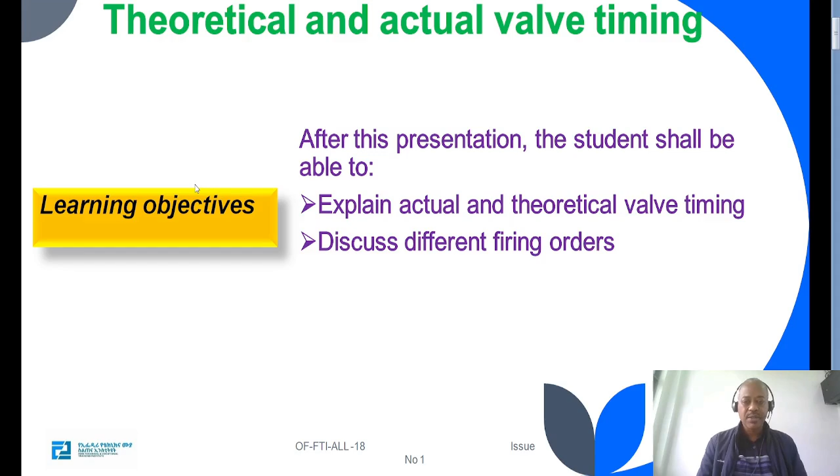Theoretical and actual valve timing. What's valve timing? Valve timing refers to when the valve opens and closes in relation to piston position. The specifications are given as degrees for the timing point before or after TDC or BDC.

TDC and BDC are the terms used to represent the position of a piston. When the piston is at the top, we say it is at top dead center, and when the piston is at the bottom, we say it is at bottom dead center. So the two centers represent the position of the piston.

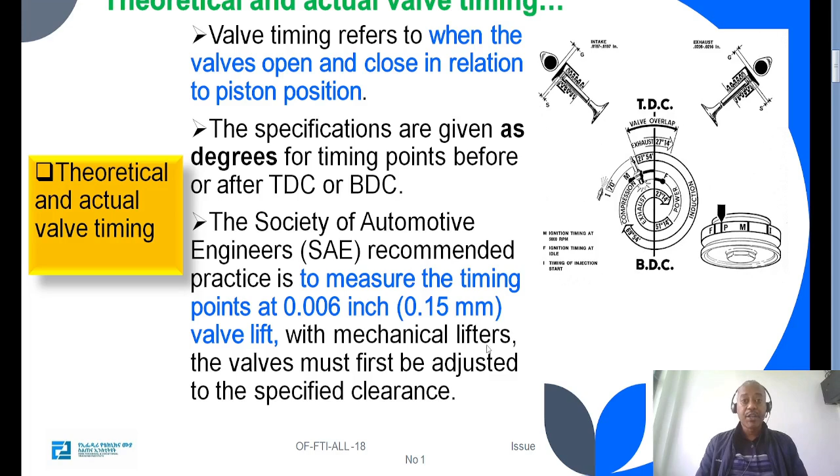The Society of Automotive Engineers recommended practice is to measure the timing point at 0.006 inch, or 0.15 millimeter, valve lift. With a mechanical lifter, the valve must first be adjusted to the specified clearance.

The fuel injection starts at TDC after the compression. At this point, fuel is injected, or the ignition system releases a spark, and this process continues some degrees after TDC. The exhaust valve opens at bottom dead center, and the exhaust valve closes at top dead center.

So the four strokes of the four-stroke combustion engine are shown here. In the case of the theoretical valve timing diagram, all valves open and close within their assigned process. For example, the intake valve only opens and closes during the induction process, and the exhaust valve only opens and closes during the exhaust process. So there is no technique or way to improve the efficiency of the engine.

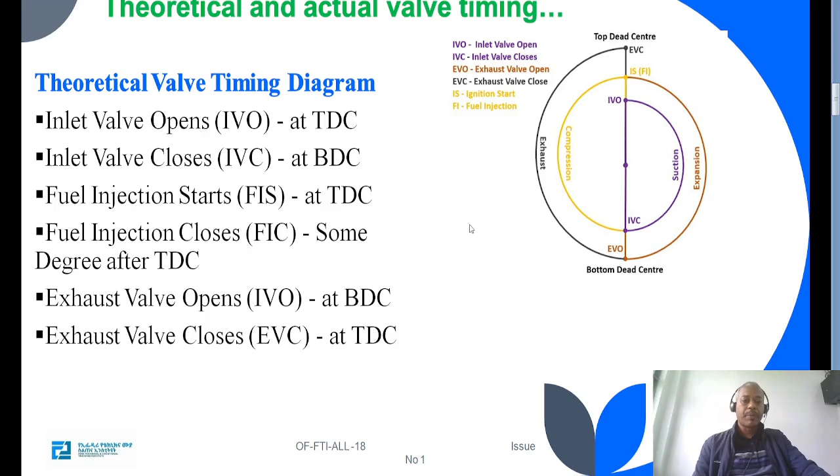Normally, the theoretical valve timing diagram is not applicable; it should be adjusted. So let's see the actual valve timing diagram. The actual valve timing diagram is applied on the combustion engine. For this specific engine, let's discuss all the cases.

In the actual valve timing diagram of the four-stroke diesel engine, the inlet valve opens 25 degrees before TDC, and the inlet valve closes 25 degrees after BDC. But in the theoretical case, the intake valve opens at TDC and closes at BDC. Now the intake valve opens during the exhaust process and closes during the compression process, so there are additional opening angles for the intake valve.

And for the fuel injection, it starts 5 degrees before TDC in the compression stroke, and the fuel injection continues until 25 degrees after TDC, so it closes 25 degrees after TDC.

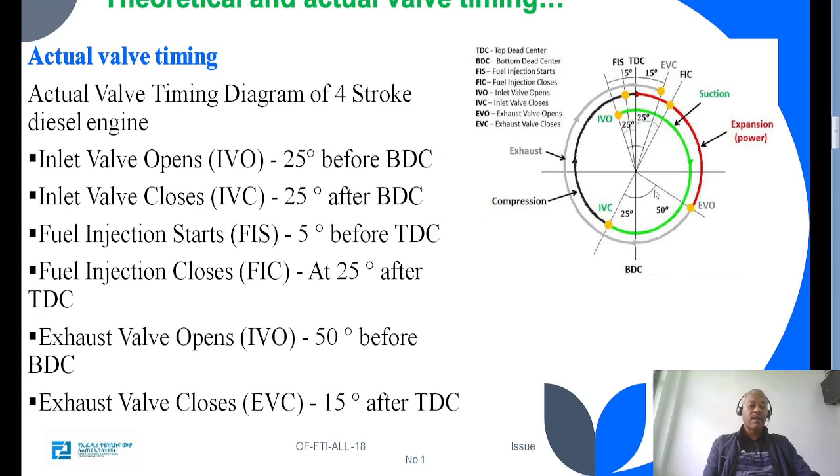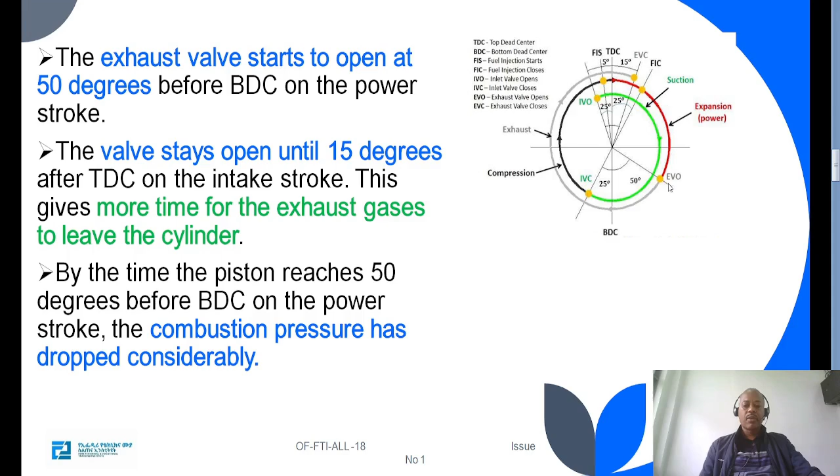The exhaust valve starts to open at 50 degrees before BDC on the power stroke. The valve stays open until 15 degrees after TDC on the intake stroke. This gives more time for the exhaust gas to leave the cylinder. By the time the piston reaches 50 degrees before BDC on the power stroke, the combustion pressure has dropped considerably, so little power is lost by giving the exhaust gas this extra time to exit.

The intake valve starts to open 25 degrees before TDC. It remains open for 25 degrees past BDC, after the intake stroke ends. This gives additional time for the air-fuel mixture to flow into the cylinder, so the volumetric efficiency of the cylinder will be increased.

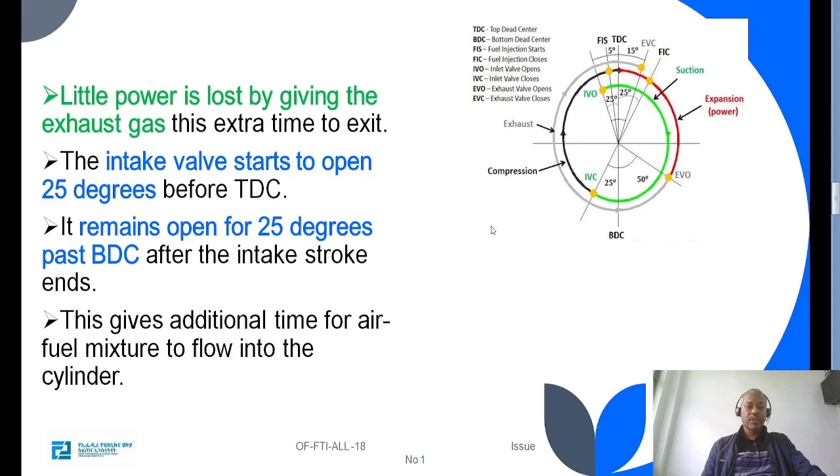The exhaust valve closes 15 degrees after the intake valve opens. This is a valve overlap of 40 degrees.

What's valve overlap? Valve overlap is the number of degrees of crankshaft rotation during which both the intake and exhaust valves are open.

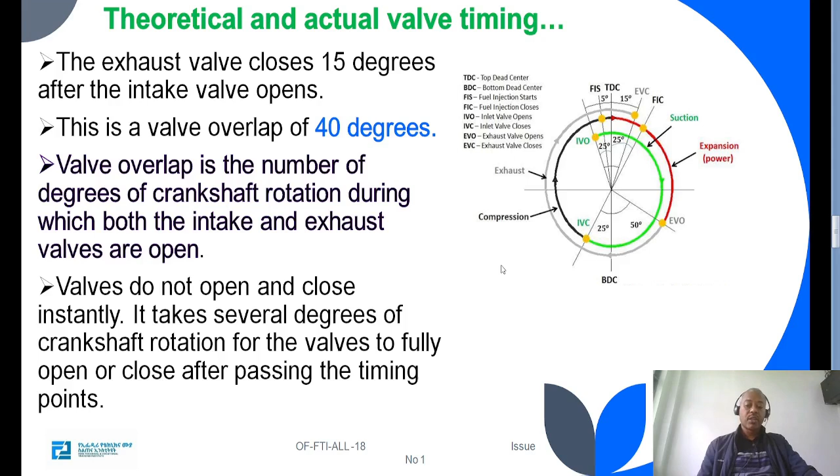Valves don't open and close instantly. It takes several degrees of crankshaft rotation for the valve to fully open and close after passing the timing point. Valve overlap helps scavenge or expel the remaining exhaust gas from the cylinder.

This is the valve overlap angle: 25 degrees plus 15 degrees. So the two valves are open at the same time for 40 degrees. So valve overlap is 40 degrees for this specific engine.

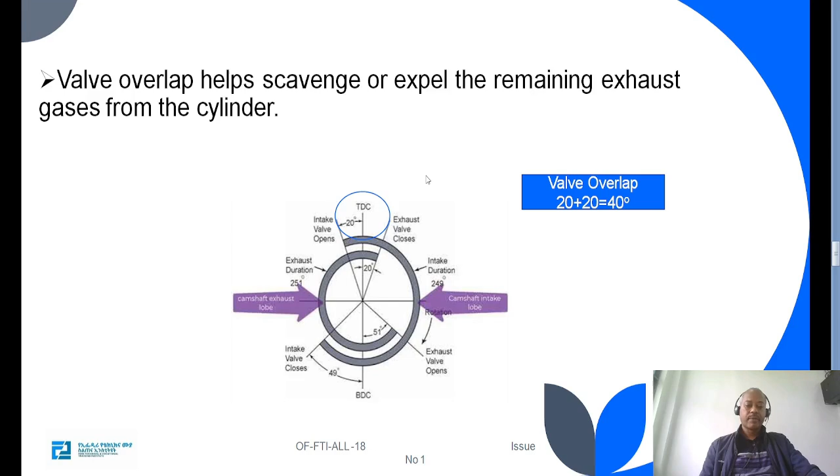Valve timing is a function of cam lobe shape and the relationship between valve opening and closing and the position of the crankshaft.

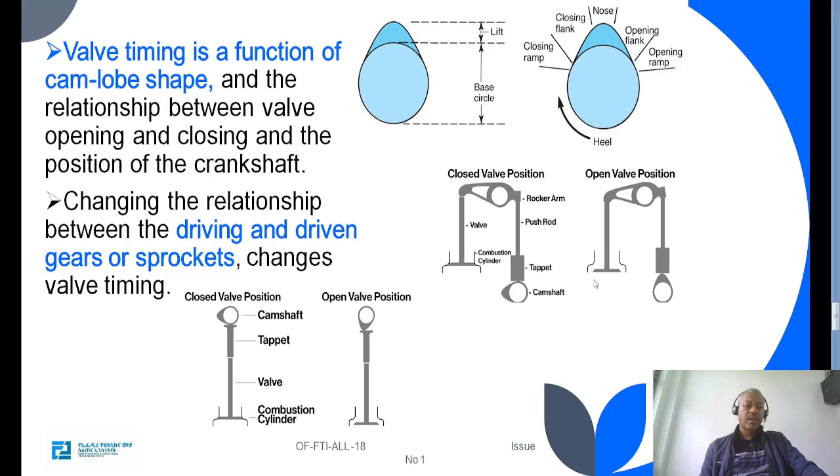Changing the relationship between the driving and driven gear or sprocket changes valve timing. For example, suppose a worn timing belt or chain jumps time — this causes the camshaft to fall behind. The valves open and close later, which reduces engine performance and causes engine overheating.

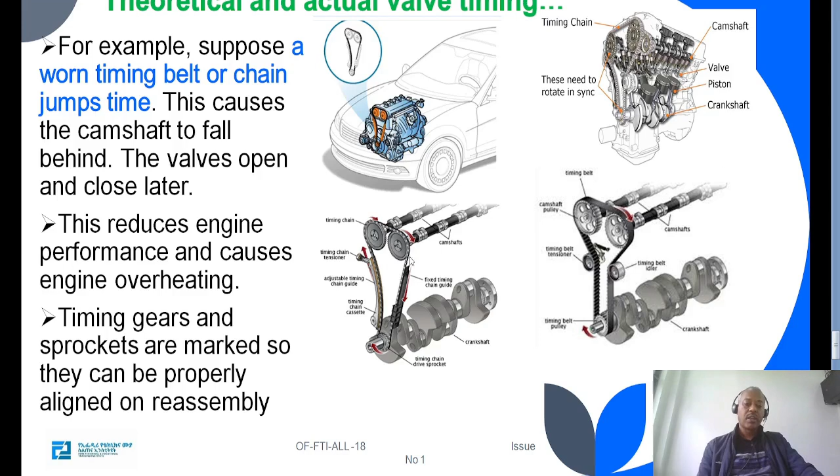When there is wear in the timing belt or chain, a jump of time will occur. When a jump of time occurs, it causes the timing to fall behind, so the valve opening and closing period will be affected.